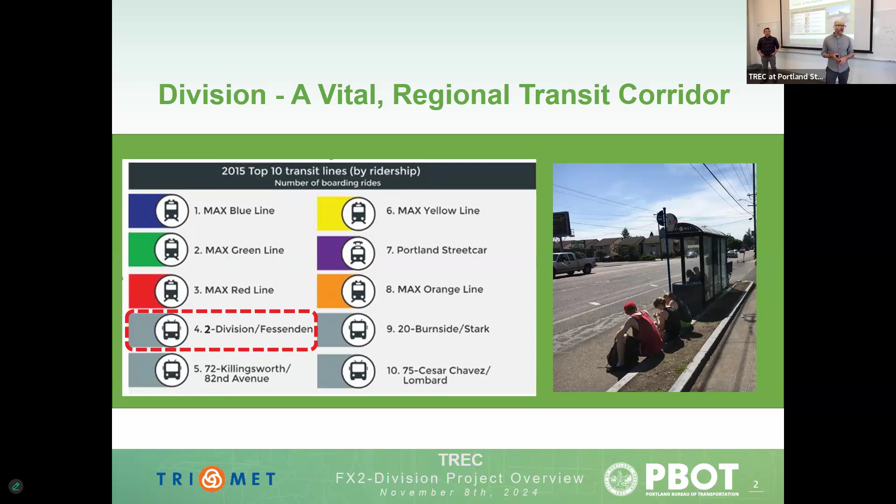Back in 2014, early planning started as part of the high capacity transit plan coming out of Metro to look at where BRT corridors could be in the region. Division Street at the time was right up there with MAX lines in terms of ridership. It had some of the highest ridership we saw anywhere in our system. And there was a real need to improve transit travel times and reliability, especially for those folks living in East Portland that really relied on that service to get to downtown and daily needs.

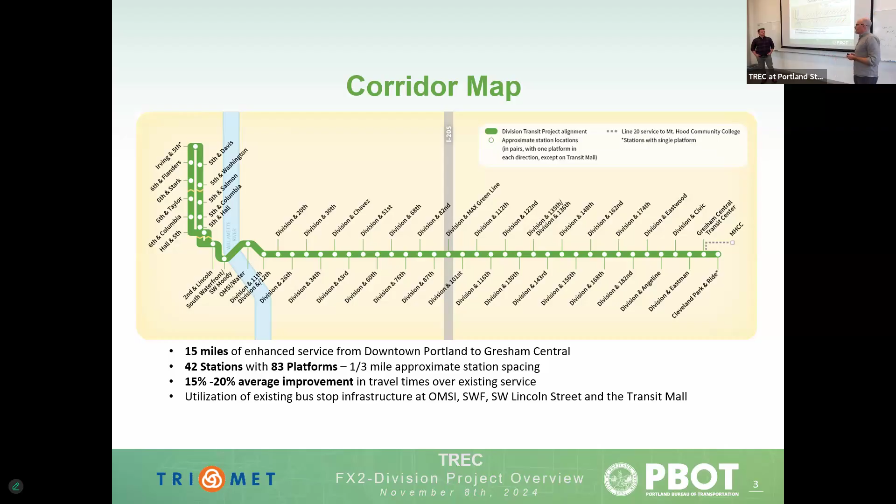In terms of the corridor itself, it is a 15-mile corridor when you take into account its connection within the transit mall. It connects downtown Portland to Gresham in the east, and it is made up of 83 station platforms placed about every third of a mile along the corridor. At the time, this was our first BRT, and we had hoped in doing our early planning and design work for about 15 to 20% travel time savings when we looked at all the different tools. And I'll talk about those tools in a moment.

In terms of just the overall timeline for the project, I had mentioned we had started the planning work in 2014. Design, what we call project development, really started in 2017. This was a Small Starts project, with FTA federal funding for half of the investment, which was a $175 million project. So design took place over the course of about 2 years, then construction for just shy of 3 years, with service ultimately opening in September of 2022.

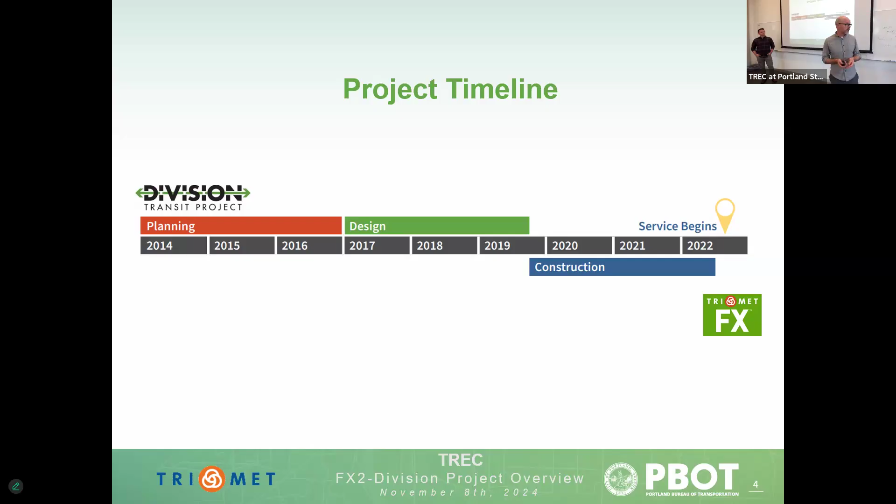So what does it mean when we talk about FX? What does it mean in terms of BRT for our region? For us, it means 60-foot articulated buses. I'm sure you've seen those green buses going up and down the transit mall with 3-door boarding. We have consolidated stops that I talked about. We ended up, I think, on Division, removing close to about half of the stops that were pre-existing on the corridor. And we really looked closely at where the highest ridership was, where we were getting most of the ramp deployments for mobility devices, and where their destinations are.

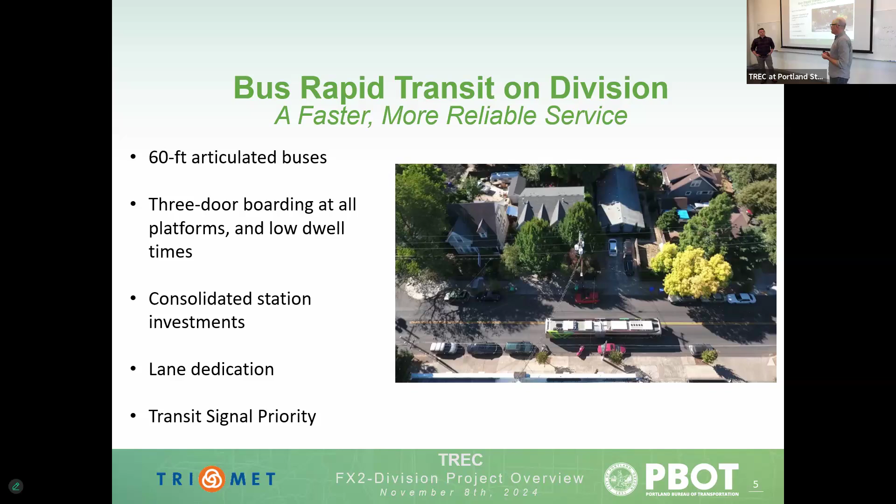And we use a host of other tools, including lane dedication. We'll talk more about transit signal priority in a moment, but placing stations far side of intersections to be able to get more efficiently through those intersections, having near level platforms so riders can step on and off the bus much more quickly, having bikes on board, having in-lane stops so a bus is not having to pull out and then pull back in. So a host of tools that we use to improve service on Division.

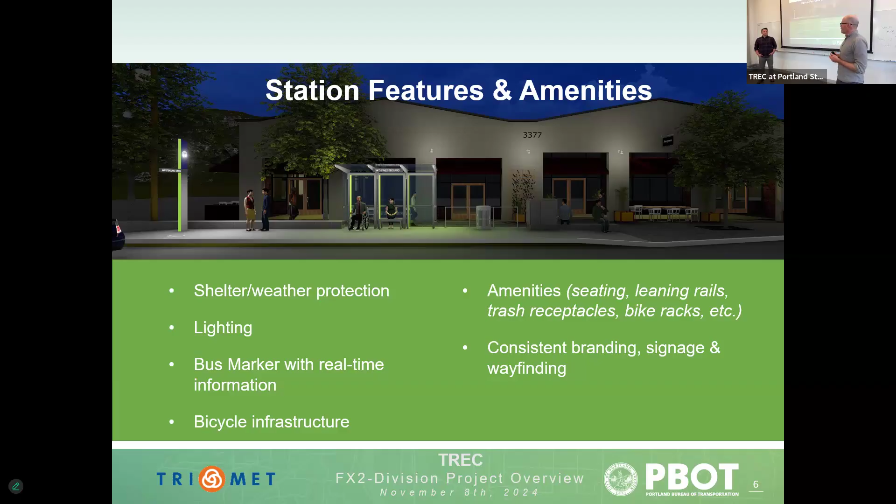I'm going to talk for a moment here about the station designs. For FX, and Division specifically, if you know Division, there's inner Division, which is a 2-lane cross section, sometimes a turn lane, and then you get out closer to Gresham and you get into a 5-lane cross section. And the urban context is very different. And so we knew we were operating in a lot of different contexts, and our station designs really needed to respond to that. And we also saw this as an opportunity to not only design for Division, but design for the region, anticipating we would do future FX in other places.

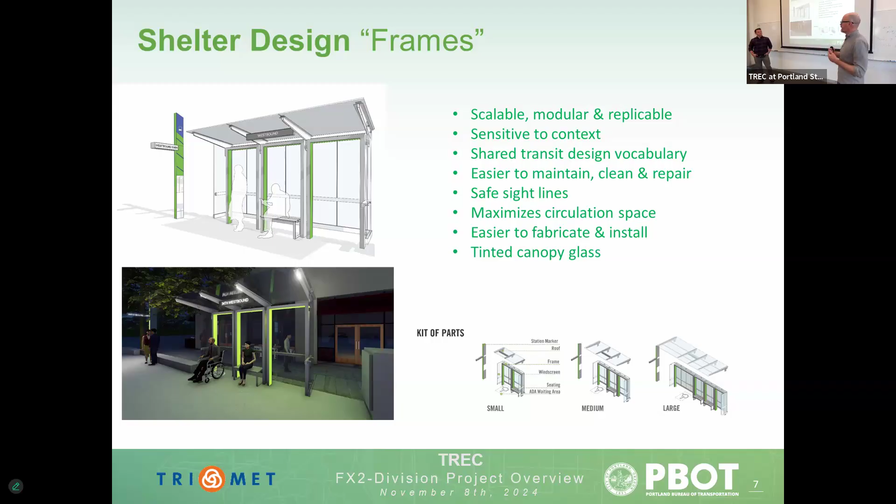And so we looked at a custom station design, a shelter design that we refer to as a frames design, that allowed us to really have this flexibility. So if we were right up against a building, we could look at reducing dimensions by removing some of the side wind screens, or if we had higher ridership, we could simply expand the shelter design. So we were really looking for this flexible design that could work in a myriad of contexts. And this station design we imagine to be rolled out on future FX lines as well.

Also, something unique to the project was looking at different station typologies to also respond to the context. Between 82nd and 175th, there is a protected bicycle lane, and we really needed to figure out a way to weave our stations within this constrained environment and with the protected bicycle lanes. So we ended up, after a 6-month work session working with a lot of different partners and interests, landing on what we called the shared bicycle and pedestrian platform design, which is a 4-foot step out, a 3-foot bike lane, and the station dimension can change, but it's typically anywhere between 10 and 12 feet.

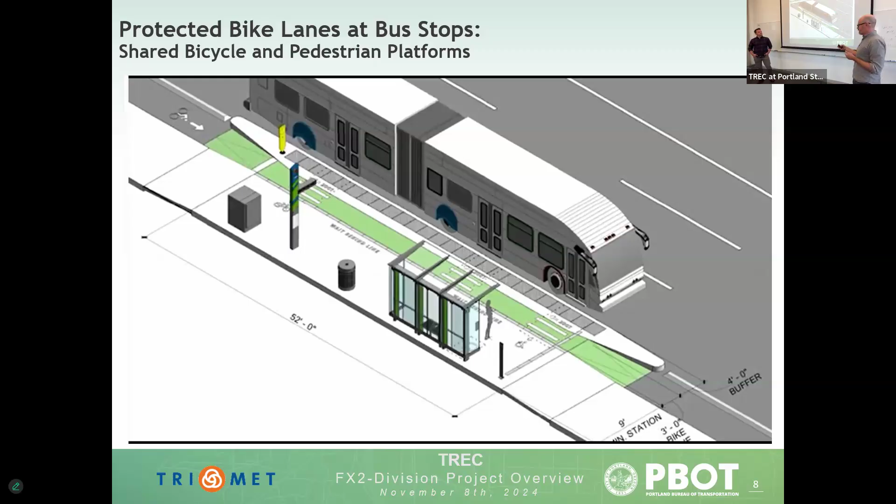And so this design was really a result of a lot of work with our partners, also involving groups like the Pedestrian Advisory Committee, the Bicycle Advisory Committee, and the Committee on Accessible Transportation. We started in work sessions with plans, then eventually graduated to putting tape on the ground, to then saying, hey, if we're really going to do this and put this across the corridor and potentially even use it elsewhere, we need to really understand how this works in the real world. And so we eventually built a full-scale mock-up out of plywood with the ability to have station elements and dimensions shift and change in real time.

And over a series of months, we orchestrated a series of simulated testing and brought operators out and bicycles out, people in mobility devices, and we asked them to run through a simulation of how this would work and really tested it from all of those perspectives.

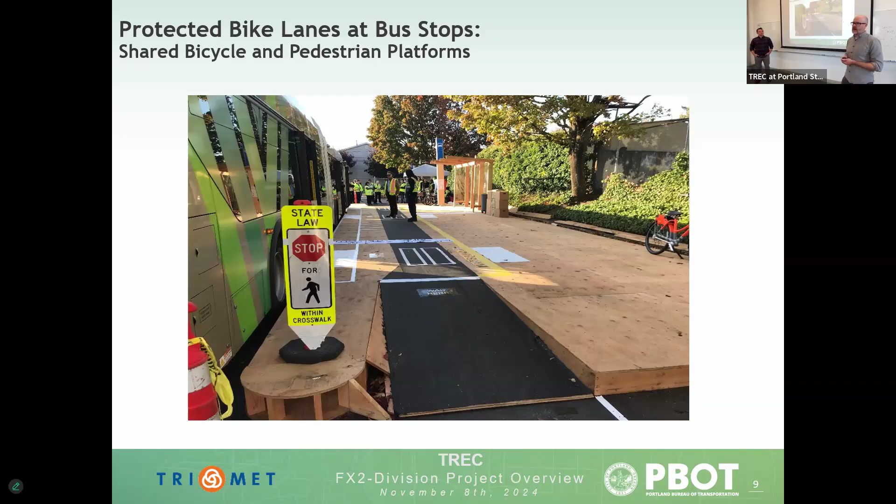We also asked individuals to be their baddest selves and act as if someone may not operate and use a platform how we think they may. So what does it mean if a bicycle is going the opposite direction? What does it mean if someone's walking in the bike lane? So we're testing all of those scenarios too, to make sure that if we were putting something out like this out in the street, we really understood how it operated.

And so ultimately, after doing that work, we ended up landing on this design, what again we call the shared bicycle and pedestrian platform design. The expectation is that when bikes come to a station platform area and there is a bus at the station, those bicycles stop, passengers unload and load, and then bicycles can continue. I think you can probably guess that that never happens, right?

So, just to continue this rigor around this station design, we ended up working with PSU, Nathan McNeil and his team. Again, we really wanted to understand how this was working, and not just by doing early study design, but once it's been implemented, what does that mean? Is it working? Is it not working? Are there places to have some of these modifications?

So Nathan and his team over the course of a couple years ended up doing monitoring of eight different station locations, to understand through the use of cameras, video, what those intersections are like. And as I mentioned, no surprise, the bicyclists never stop. But what we're finding is these station environments are working quite well. We're seeing very minor conflicts at times between pedestrians and bicyclists, but for the most part, they're able to navigate those

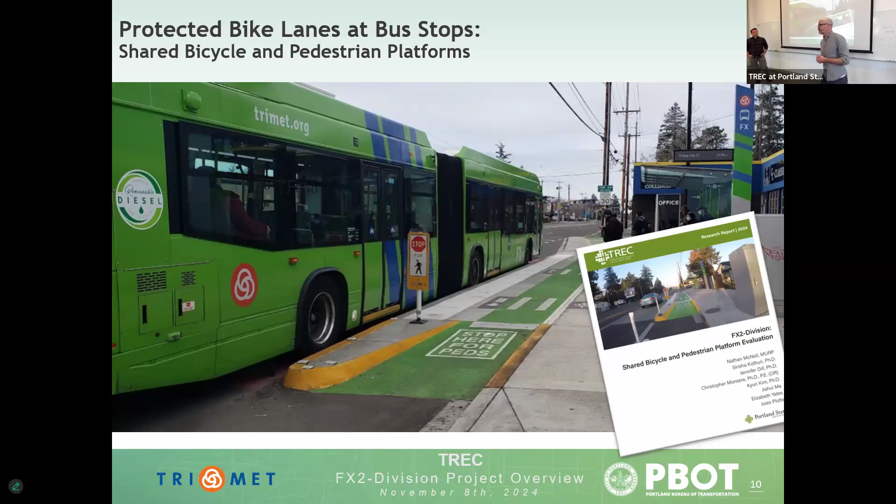relationships. And in a place like Division, where it's a high crash corridor, and when we put bikes in street and we see the conflicts in that case often being deadly, this seems like a far better approach if you were to ask me. So we're going to transition over to another tool. We had mentioned briefly transit signal priority, that ability for buses to talk to signals. And it is another place where for FX and Division, we are really looking to do something different and innovate. So I'll turn it over now to Mark to talk a little bit more about that system and how it was implemented and how it's performing on the corridor.

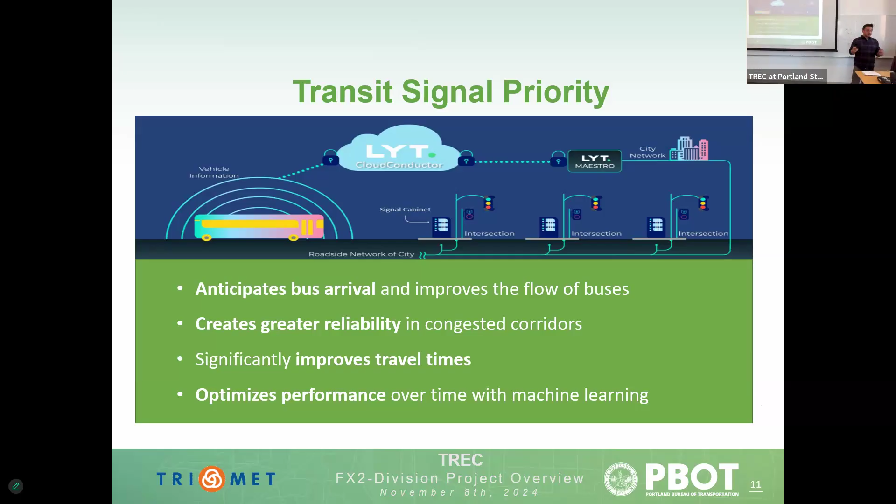But first, I want to kind of put you in my brain space as this project was being developed. So we had this incredible opportunity to reimagine what traffic signal operations look like along a corridor. We touched 45 signals as part of this project. We really wanted to rethink what are our priorities, what are our goals. And traffic operations relies heavily on space and time, but really mostly time. And since time affects everyone a little bit differently, we wanted to center ourselves by looking at our work through some lenses.

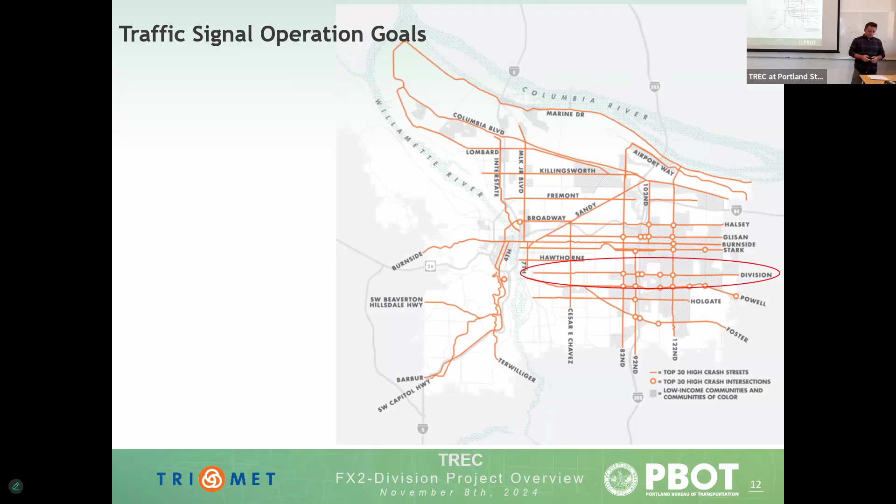So first, as Jesse mentioned, high crash corridor. Division is part of our high injury network. It is considered a high crash corridor. And 5 of the intersections along the corridor are also high crash intersections. So we wanted to look at our work through a lens of safety. The next lens was a lens of equity. There are 11 high equity zones along Division, according to the PBOT equity matrix. And what that means is those are places where we really want to focus our efforts, our investments, to improve the lives and livelihood of the communities that live there in a context that's appropriate for them.

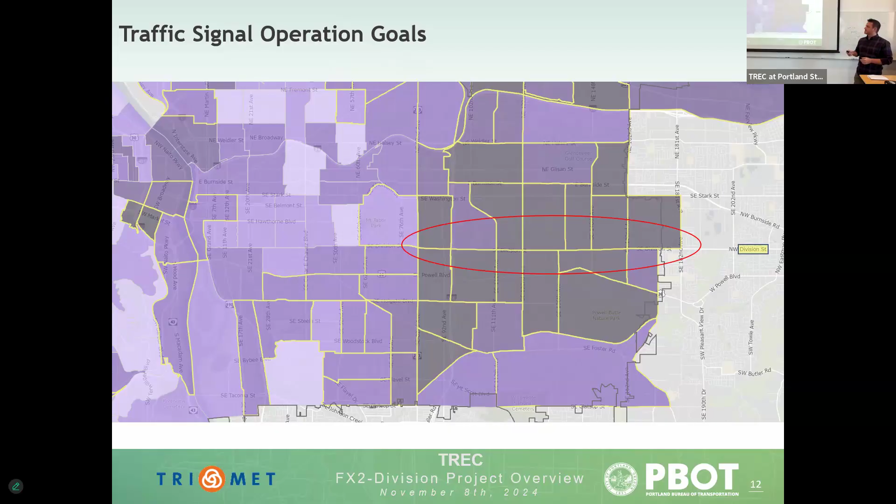And the third lens we chose to use was the PBOT modal hierarchy lens. So PBOT has a modal hierarchy where at the very top, the highest priority are people walking and rolling, then people on bikes, public transit, and then at the very bottom, private automobile use.

As I said, we touched 45 signals as part of this project. So that included all new signal timing for 45 traffic signals. There were also 2 ODOT signals and I think 9 or 11 Gresham signals. As part of that, we added 18 pedestrian head starts. Those are advanced walk or LPIs. That's what PBOT calls them.

At 14 locations, we exclusively phased the pedestrian movements crossing Division, which means we gave them an exclusive time in the cycle to further protect their movement. We also developed a ped priority routine for all 45 signals, and that's basically if someone pushes the button, they shouldn't have to wait for their time in the cycle to get access. They push the button, they get access almost immediately. And then we'll talk about next-gen TSP also at the 45 traffic signals.

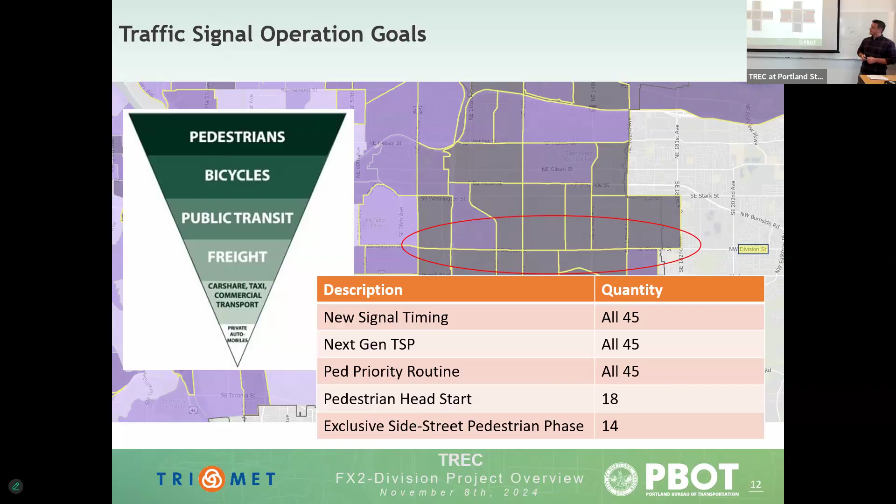So let me talk about design for a little bit, because all through this process, we were looking at design. How does that affect operations? How does that affect next-gen TSP? And how does that all work together to create a better system for people living and traveling on Division?

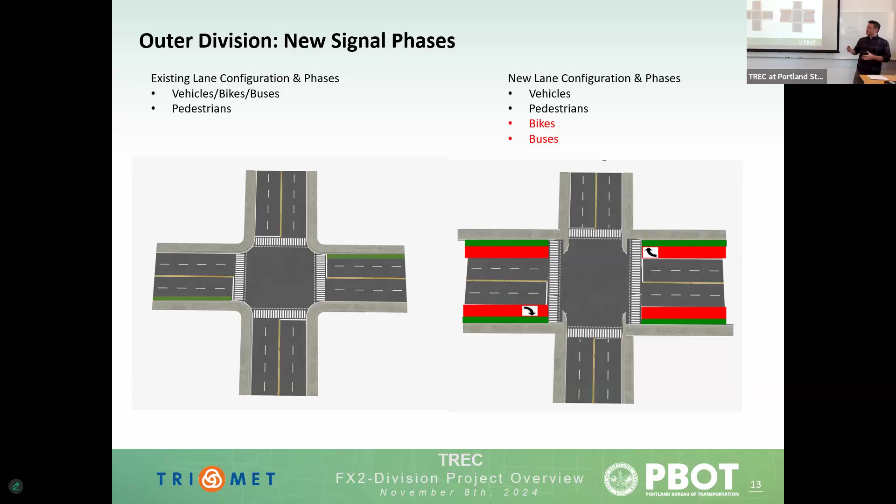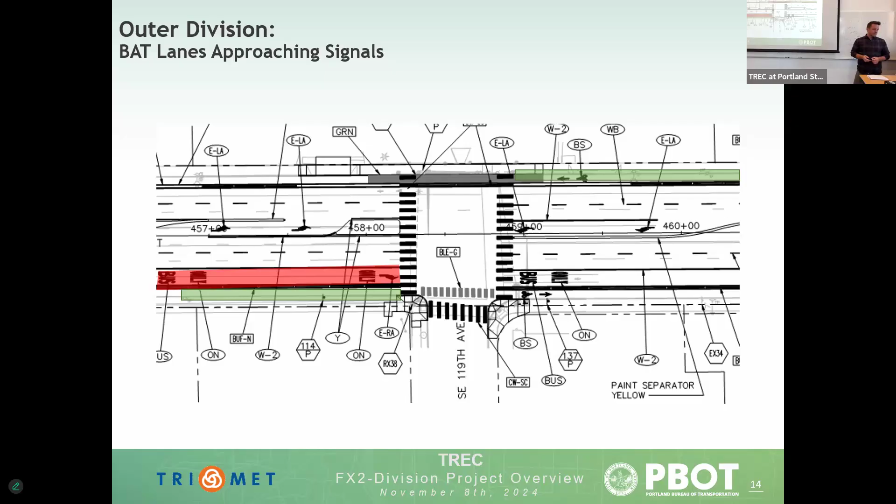So let's look at the design. So here's an example at 119th and Division, where we added the bus only lane and the right turn only lane to the left of a bike lane. You can see that in the eastbound direction. And what does that look like from a signals perspective? As you view the signal mast arm, you can see there are indications now for the through movement. There's a right turn only signal, a separated bike indication. And then we also introduced this bus signal to give further clarity for the bus operators and other traffic that there's something different happening here.

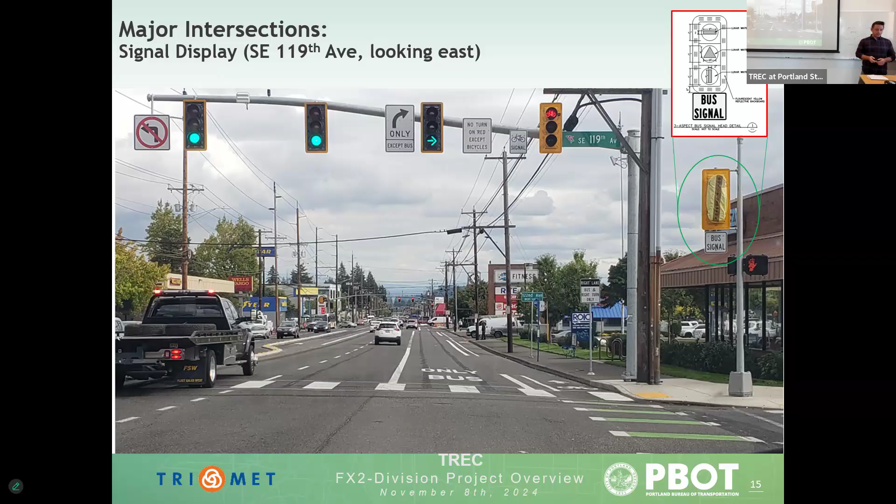Now, for that signal, we did rely on the 2009 MUTCD to create a design for the bus signal. So the horizontal bar represents the red, the vertical bar represents the green, and the triangle actually flashes, and that represents the yellow indication. Here again, you can see an approach. This is at 122nd and Division. And the bus just made it through. So now their signal shows a horizontal bar, which indicates red. And you see a protected right turn overlap that's happening at that time.

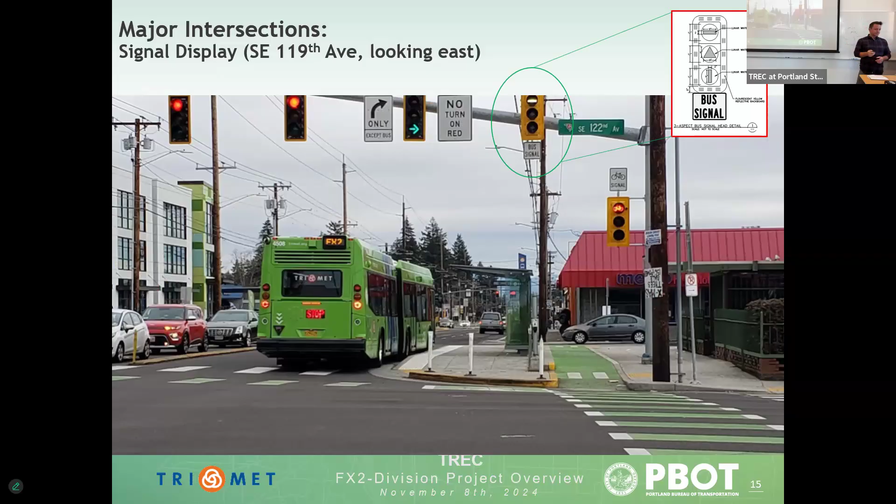So that was all part of the sort of design phase. These were some of the more complicated intersections, if you will. Now let's talk a little bit about operations. So here's that same intersection, 119th and Division. This would be a traditional 8-phase intersection. So our intersection timing might look something like this.

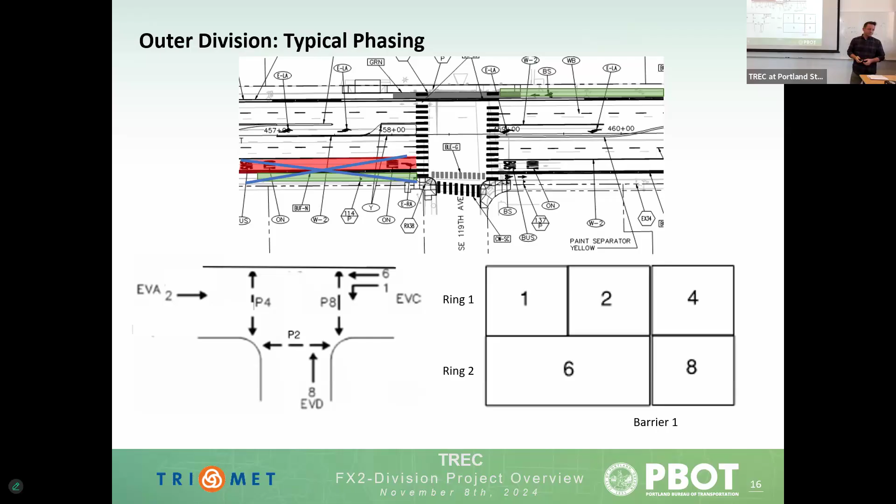And for those who haven't seen this before, imagine a vertical bar running through this rotation. And any square that vertical bar intersects, those are the movements that can go together. So you see 1 and 6 would be able to go together. And on the diagram to the left, you can see 1 and 6 would go together. So that's what it would traditionally look like.

But as we add these movements in, we wanted to maintain flexibility and responsiveness to the modes that are using the intersection. So we developed some different timing. So as we add in that right turn only lane, the bus lane, and move that bike lane a little bit further to the curb, we see now we have to operate this in a little bit different way. So the overlaps now are representing different movements that add efficiency and flexibility to the intersection.

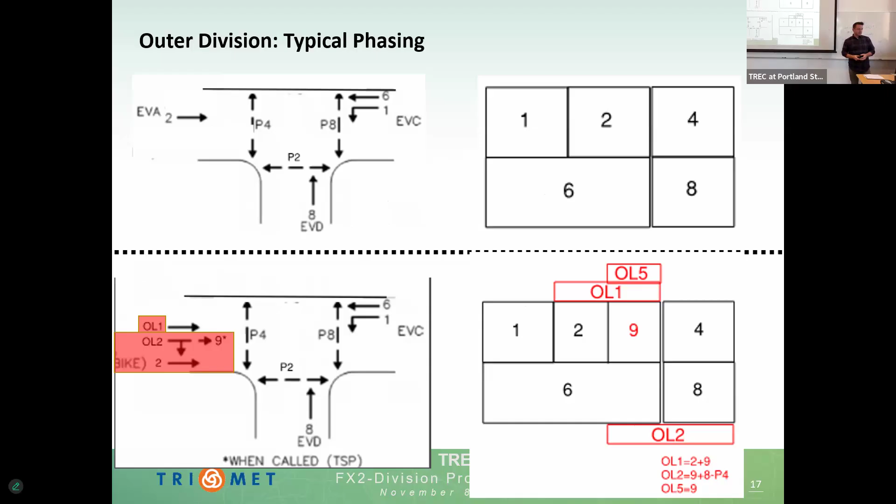Another thing that we decided to do along this corridor through a lens of safety, we decided not to run flashing yellow arrow operation. And there are some safety implications for a permissive left turn movement like that, especially considering people crossing the street. So what we did instead was we found another feature in the controller called vehicle reservice. And what this allows the controller to do is if there's a gap in oncoming traffic, we can bring up the protected left turn again in that same cycle, providing better performance for those left turns, while still maintaining the safety and separation for people crossing the street.

Now, all of these operation decisions took new technology. So about 5 or 6 years ago, we came up with a new standard for our vehicle detection. It used to be inductive loops placed around the intersection. Now we can capture 64 detection zones with just 8 radar detectors. And this has implications for paving activity and other things, but one of the great benefits here is we get a ton of data now about how our signal system is operating.

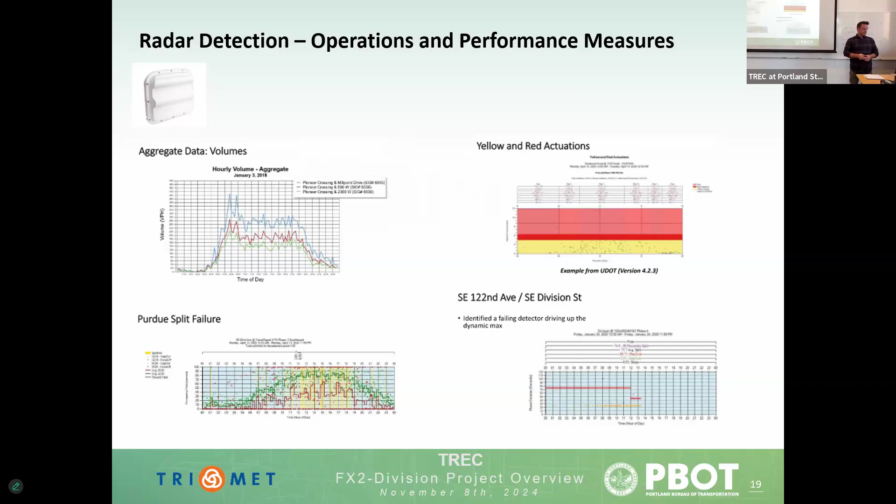So our radar detectors allow us to get not just the operational needs of the intersection taken care of, but we can also get a ton of data about how the intersection is responding to the different needs of the intersection.

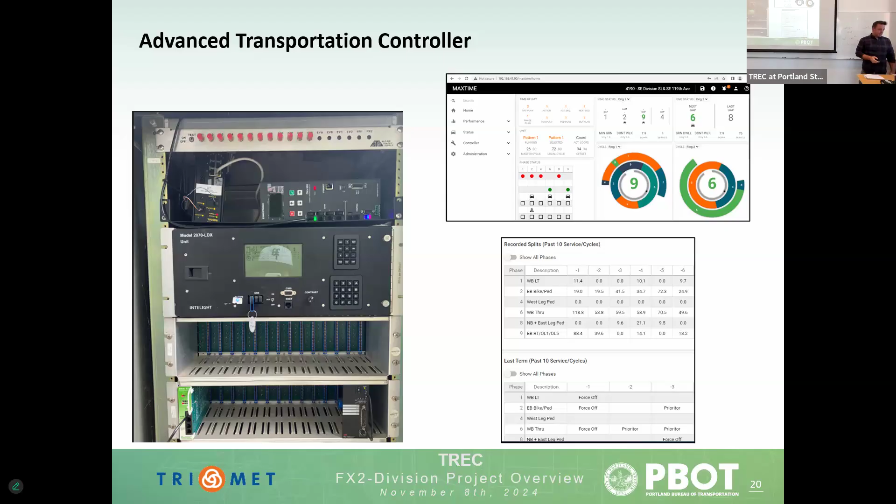Okay, so that was kind of a warm up. Now we're going to get a little more wonky. Who's ready?

Okay, so 3 of the intersections on this corridor have protected intersection elements. So protected intersection, in this case, I'm going to just talk about the piece where the cyclist movement pushes further away from the intersection to make its crossing, creating additional separation between the right turn movements and the ped and bike movements that are concurrent. So with a design like this, there were a lot more movements to think about. We had to think deeply about which movements can go together. How do we continue to protect people walking and rolling through the intersection?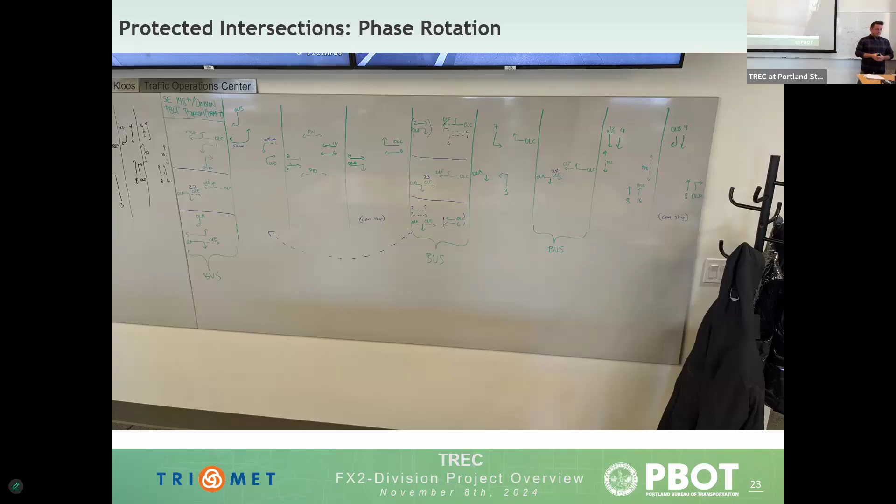And this was before we knew who our vendor was for the next gen transit signal priority system. So we actually offer a leading, a lagging, and a third opportunity for the bus to get through the signal. And what this means is that a bus could be delayed maybe up to 40 seconds if the system didn't work correctly. So worst case scenario, it's about a 40-second delay for the bus. So this was a big step in how do we get the bus through, and how do we protect people walking and rolling through the intersection. And what it took is basically, instead of running each phase as a phase, we run it as an overlap. So everything is described with its concurrent movements.

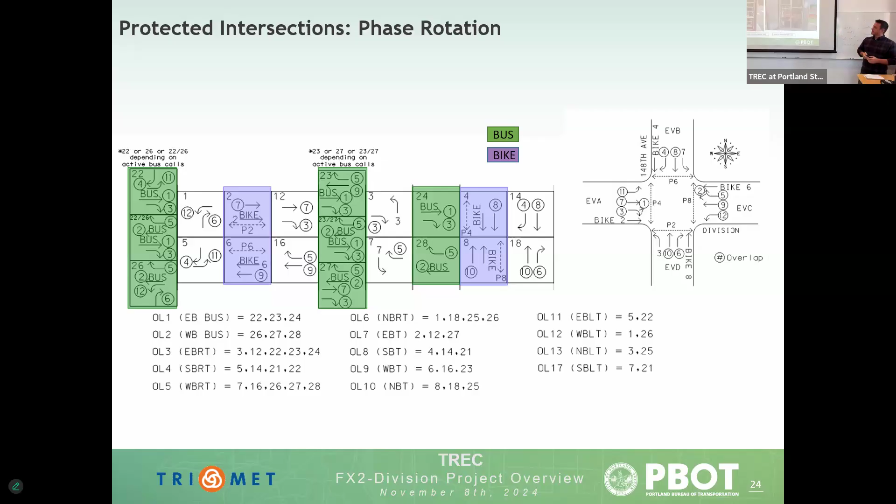And that ended up being a lot. There were a lot of concurrent movements that could happen. So much so that we had to think outside the box, literally. The 332 cabinet on the left is what we traditionally use for traffic signals. It can only hold up to 18 outputs. Those are the actual outputs that run the signal heads themselves.

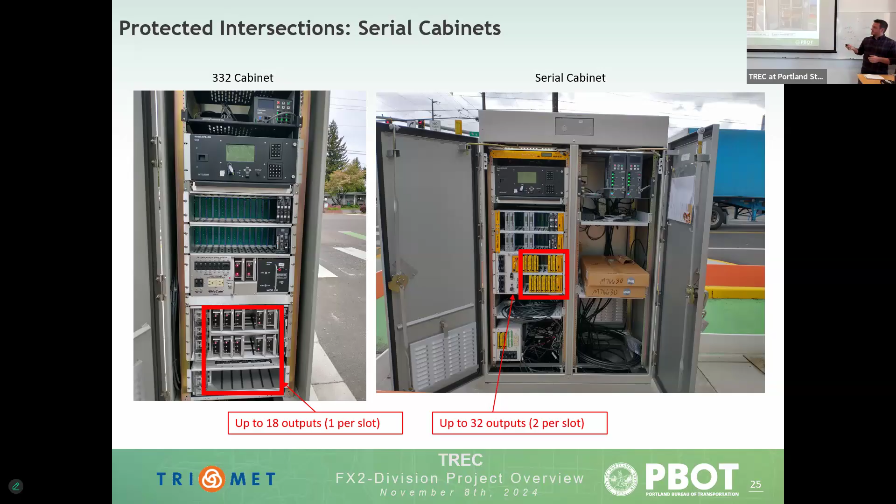With a design like this, we had to move on to a serial cabinet. That can do up to 32 different indications or groups of indications at the same time. One of the benefits here is that we get an updated conflict monitor, meaning if 2 green movements happen at the same time that shouldn't happen, the signal will go, okay, that's not supposed to happen, go into red flash.

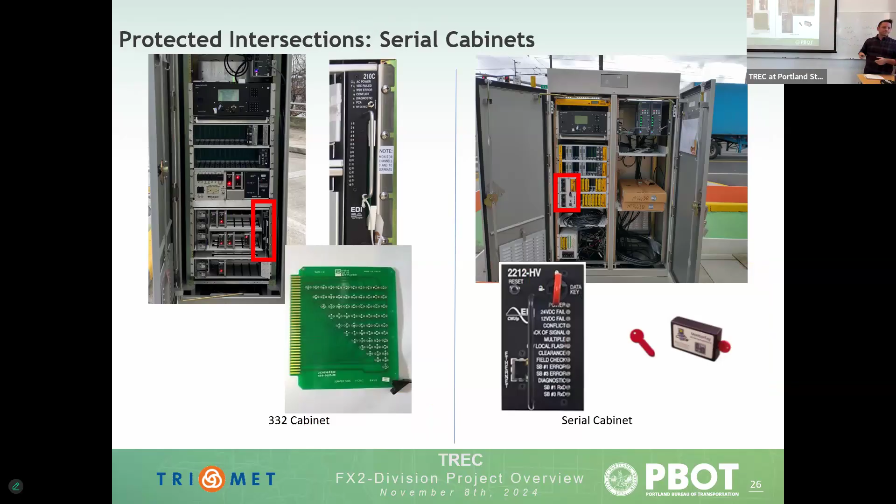Now we can monitor things like conflicting yellows. Rather than wasting these circuit boards, these diode cards, we can just update the data key. So it's, again, a little bit better for our maintenance teams. And this is a picture of the back. So the wiring is pretty similar, but the nice thing here is you can pull out the terminals, do your wiring, plug it back in, rather than trying to fit a bunch of wires on one screw-in terminal.

Okay, so that's a little bit about the design and operations. Now I want to just take a brief moment to talk about the unsung hero here. As we get into this conversation about TSP next, fiber really has become our backbone for our communication on this corridor. And again, we did something a little bit different, a little bit outside the box. So traditionally, fiber looks like it does on the left. We needed more fiber, more capacity for our communication system on this corridor. So we went with something called a ribbon fiber.

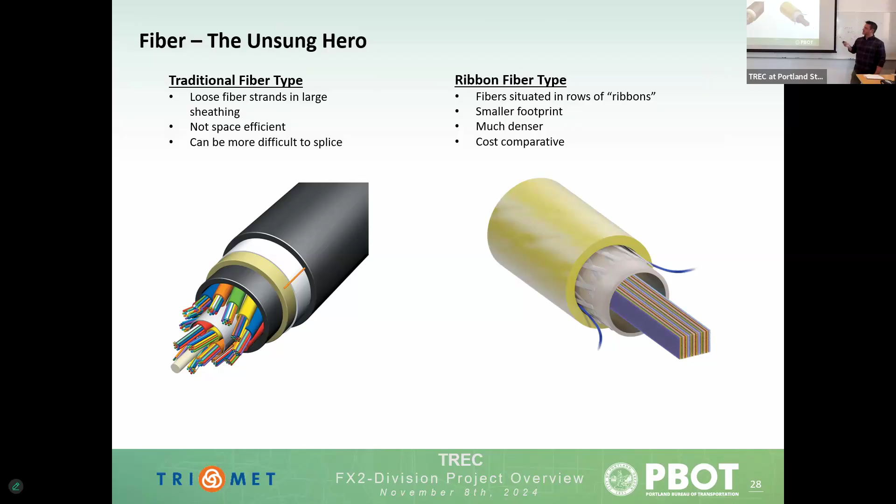And each one of these, it's hard to see again in the picture, but each one of these ribbons holds a certain amount of fiber strands. So it's a little bit more efficient packaging to get bigger capacity. And maybe this is a better view of it. At the top, you see the 96 strand. And at the bottom, what we went with is a 432 strand. So 432 strands of fiber running along the corridor as the backbone. And you can see the sheathing on the left. They're about the same width and diameter, but you get a ton more capacity.

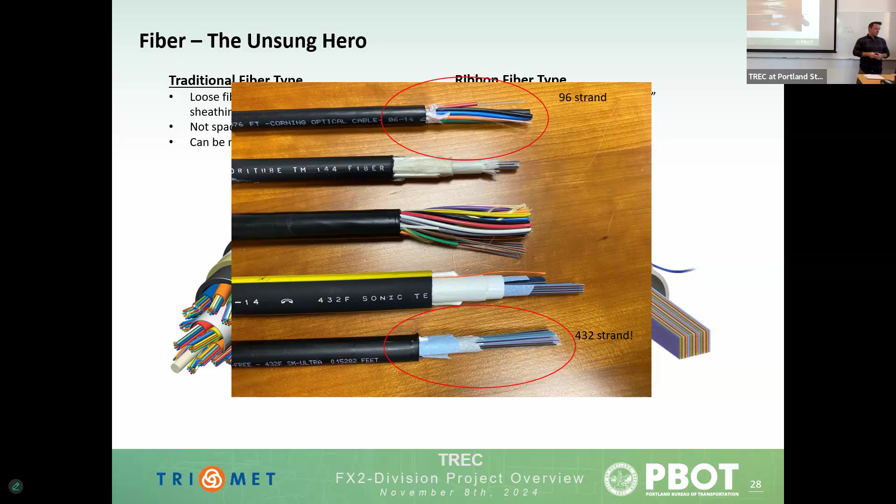And then I went to OMSI with my kids and I saw this and I thought this was interesting. So on the left, again, you see 3,000 pair or 6,000 copper wires running an old phone system. And on the right, 24 strands of fiber. And even at that size, the fiber has over 300 times the capacity of the old 3,000 pair.

So this was huge because I'm talking about data collection. I'm talking about live access to our controllers. We need something like a fiber backbone to be secure, redundant, and accessible in order for us to be able to continue to respond to our communities.

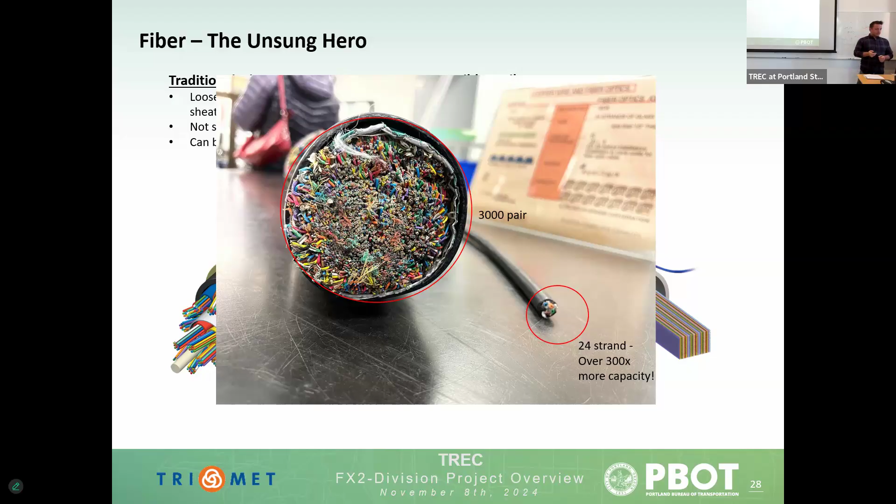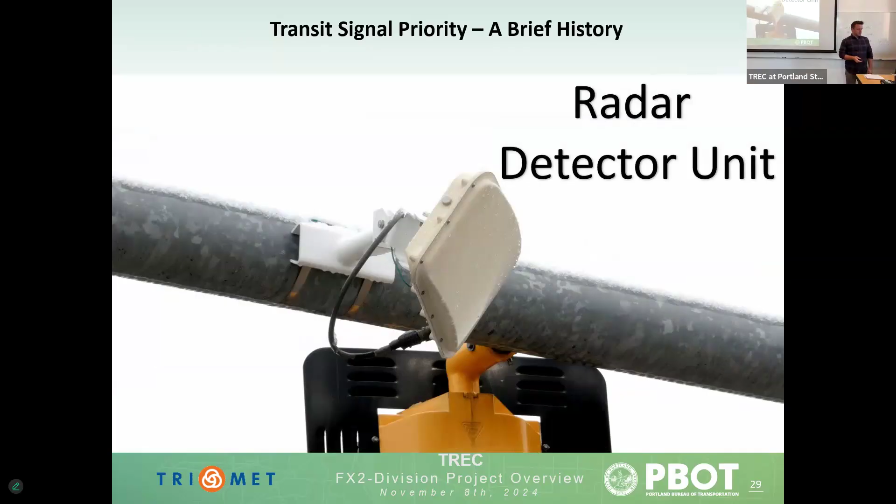The Opticom receiver, the primary use of it is to provide preemption or the highest level of priority for emergency vehicles. Now, back in 1999, the city also developed what I call the legacy transit signal priority system. And it also used these line of sight detectors to provide priority for buses. Now, why don't we use preemption for buses? Why do we use priority and not the highest level priority, preemption?

The OAR says that it dictates kind of what we can do and can't do with bus priority. And one of the main things is we can't change the sequence of the traffic signal controller. So it must maintain the sequence it usually has. And that means that if the bus approaches on a red, we can do everything we can to give it an early green without changing the sequence. If it arrives on green, we can give it a little bit more green time to get through that signal. And this was great for 1999.

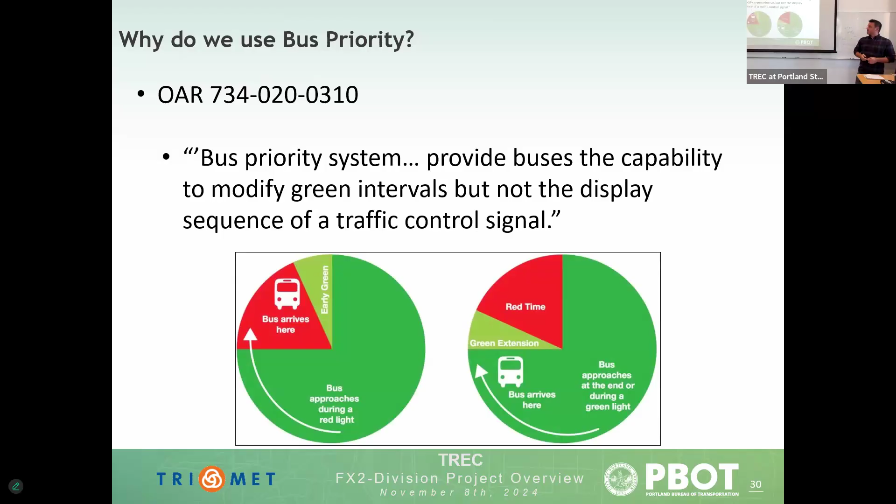And this is kind of what it looked like on the street. So the bus is traveling along, it's kind of blasting an IR at our signal saying, hey, I need priority. And the signal is doing its best to react to that input. Now this is line of sight, so it's maybe 300, 600 feet.

And one of the challenges here, maybe a benefit, if you will, depending on how you ask the question, but one of the challenges for me as an operator is I only know what's happening on my side of the system. And even back then, I barely knew. I didn't have remote access. I didn't have the data streams I have now. And TriMet really knew what was happening with the bus, but they didn't really know what was happening with the signal system. Was the benefit happening for the bus? Were they getting their TSP?

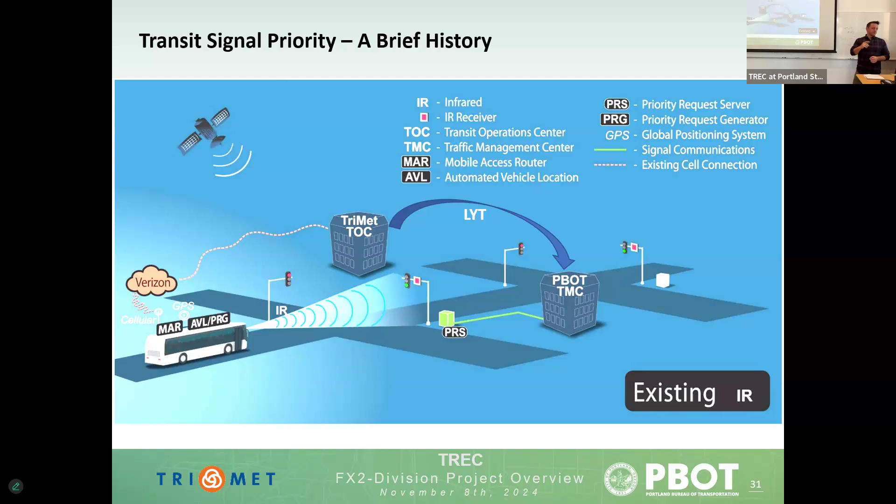We went through an RFP process and decided regionally on a vendor, and their name is LYT. They provide cloud-based transit signal priority, and they really developed a bridge between our two systems. Again, one of the challenges with that is when you integrate new systems, sometimes you run into other things that you didn't expect. So their system relies on a Maestro device, like a little Apple TV, if you will, or Raspberry Pi size. That fits on our network, and we didn't like that. It's connected to the internet, and it's sitting on our closed network.

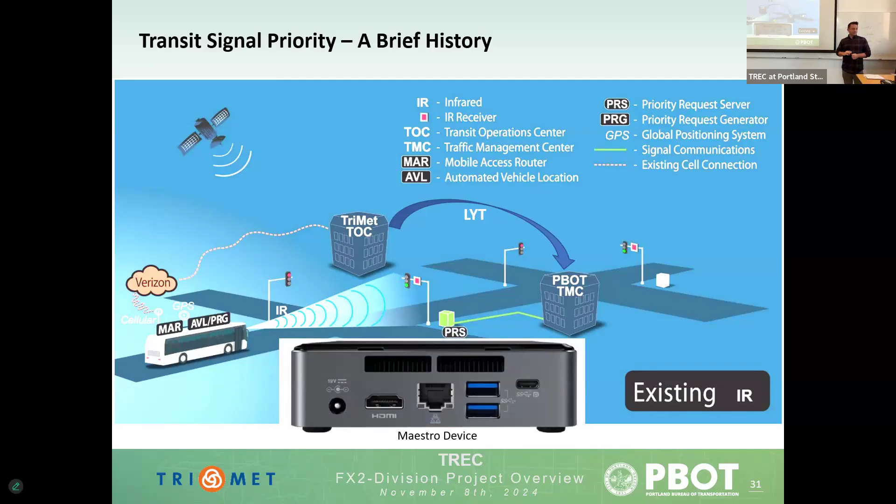So what we had to do was develop a tunnel. We created our separate VLAN. We run it through an entirely different firewall and try to separate and tunnelize that data stream as much as we can. But it does provide quite a few benefits.

So now the bus is talking through LYT. It's going through a machine learned predictive ETA model that then sends an ETA check-in and check-out to the next 3 signals in a row. So we're not now limited to 300, 600 feet away. We know when the bus requires a green with high certainty. This is also great for near side stops because that ETA is built into that near side stop.

And here's kind of what it looks like visually. The purple line represents the normalized ETA that we're receiving. The orange line is the speed of the bus, and the white dots are the bus stations. You can also see the signals there are integrated into the ETA. So we're getting ETA station to station and also signal to signal.

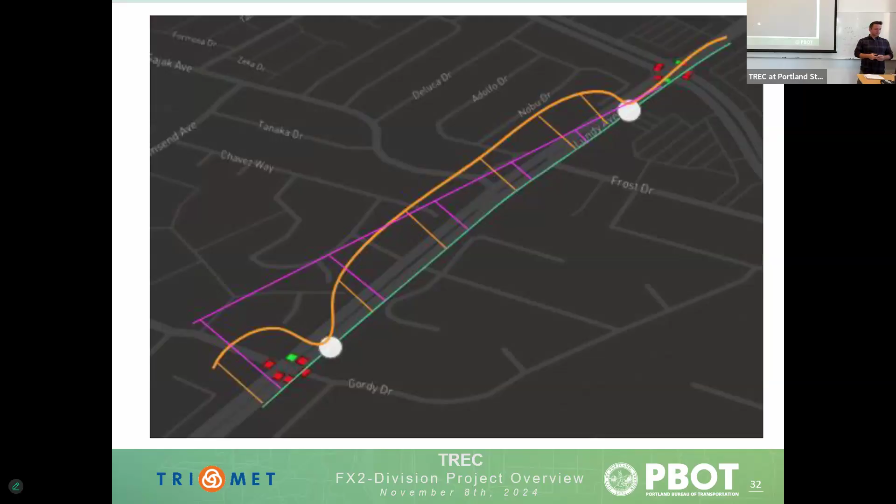Now, when we got the vendor, we had the design, we thought about operations. Now it's time to look at the controller. What can the controller do for us for TSP? And this is really the main page for the controller. It doesn't have a lot on here, and we can't use skip phases or skip ped in Oregon.

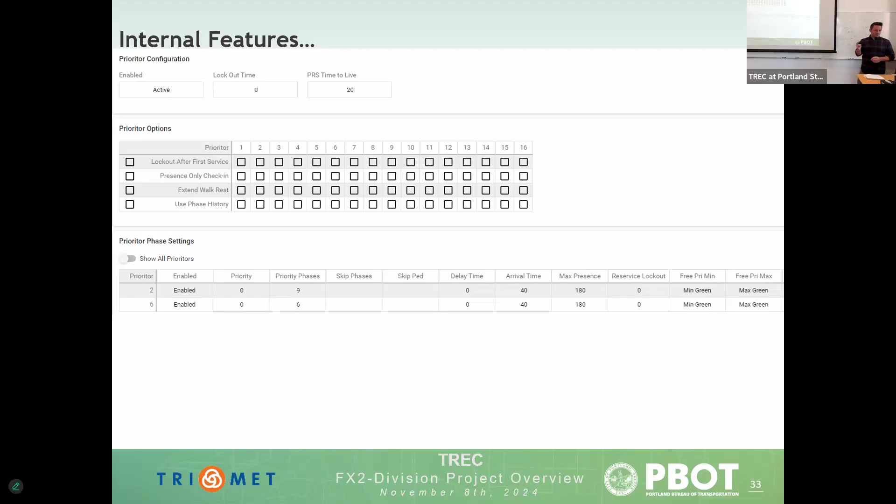So we did a bunch of testing to see what this would offer, and it often looked a lot like the legacy system. So the bus would get a green extension even if it was 2 minutes away, and the signal would hold the green a long time and then terminate right when the bus approached. So right when it needed its service, it would get a yellow or red. And since I believe that TSP is only good if it actually serves the people who ride the bus, I wanted to make it better. I wanted to give priority to people crossing, accessing their station before the bus arrives, rather than seeing their bus leave and waving at it.

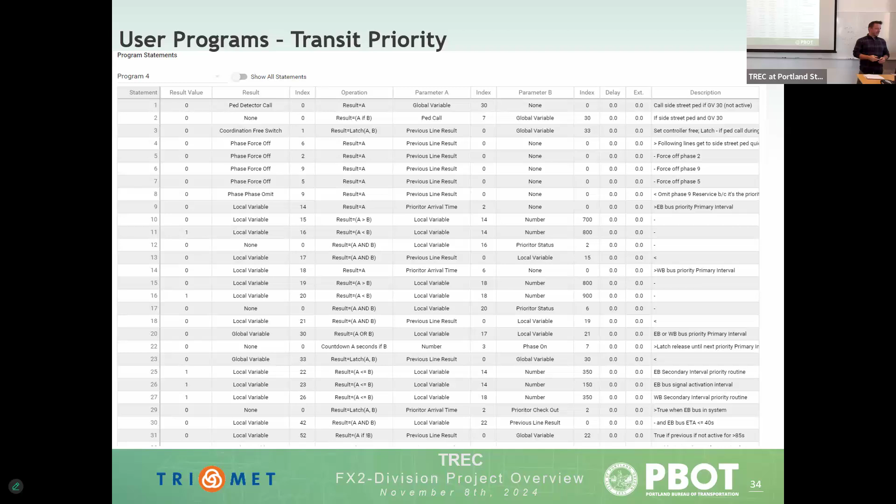Here, and bear with me, I put these animations in PowerPoint, so they're as good as I could do. Here's the bus, it's approaching. It's greater than 120 seconds away, so we're saying don't accept information about that bus. It's also maybe greater than 3 signals ahead, so again, TSP is inactive, the bus is just traveling along. As it gets closer within that 2-minute ETA, now it's checked into our controller, and our controller is saying, okay, I see you, I'm going to start reacting to what's happening.

As the bus approaches, it gets into that purple zone. So we know it's far enough away. We know enough about how our signal is operating. We can do something like provide PED priority, get people to their near side station, so that way they can actually access the bus as it's approaching.

Now the bus is a little bit closer, and this picture doesn't do a good job, but maybe it's actually serving the stop, and that's included in the ETA. So we want to kind of be in a holding pattern, be in a place in this phase diagram where we're right before that bus opportunity in the phase diagram. And we hold the signal horizontal bar or red. We don't want to provide an early green for the bus.

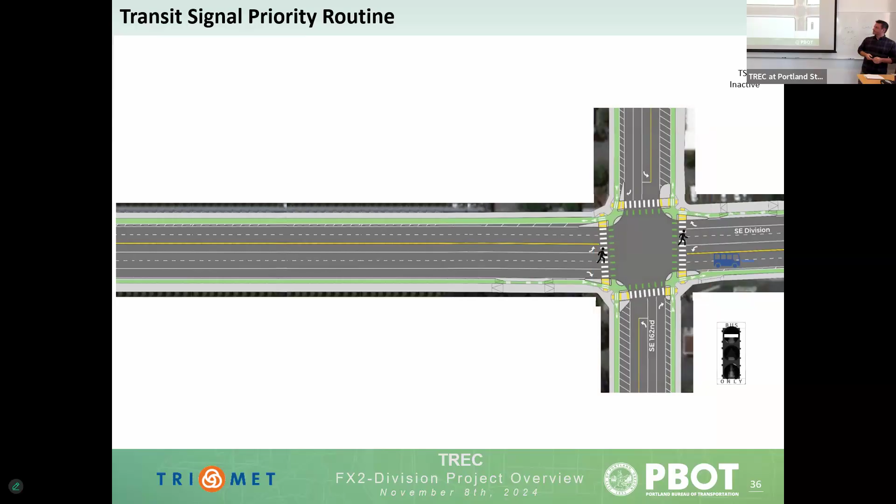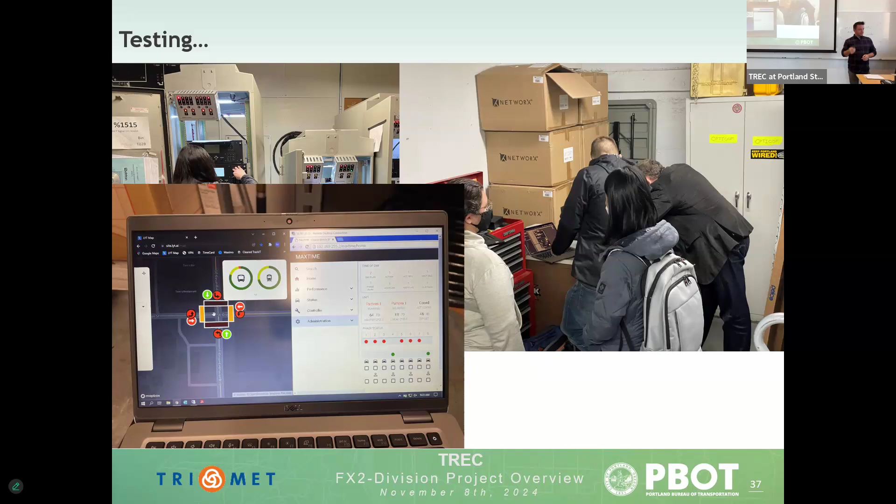So all of this was sort of outside of the controller, what the controller features allow me to do. And so I wanted to make sure we tested it. And we did a lot of testing in the shop, testing in a testing environment. We got LYT out here to do a preview of their system. We finally started testing at one intersection in the field. And then we got on the bus and we tested the entire corridor. So LYT was on the bus, PBOT was on the bus. We were traveling through these signals as they were receiving that ETA up to 3 signals ahead, up to 120 seconds away.

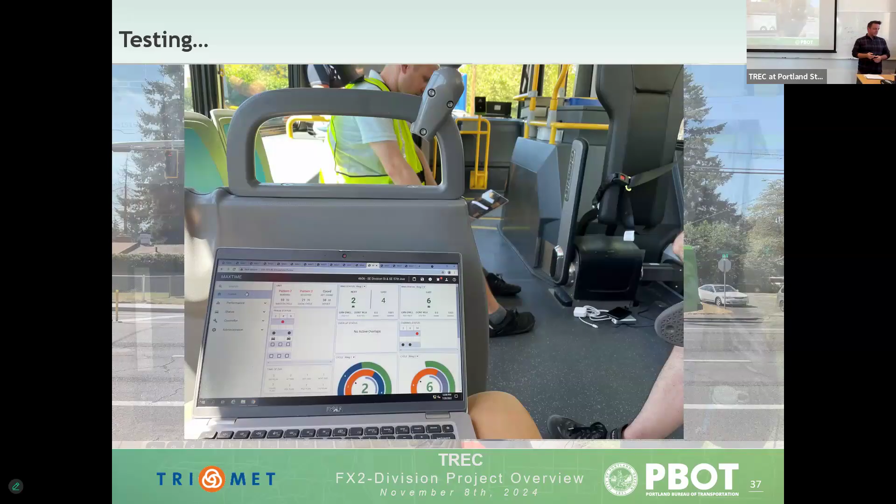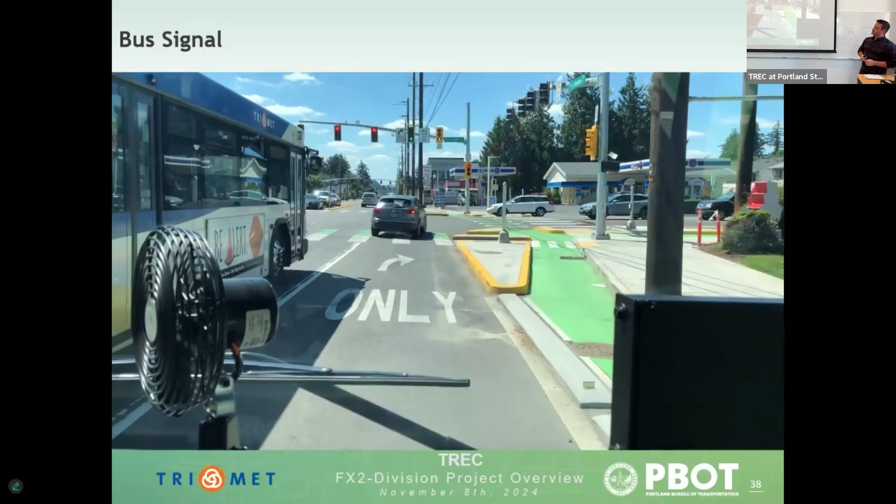And now I want to show you what a bus signal looks like as you go through. Let's see if this works. So here we're waiting for the red, we're waiting for the vertical bar, people are moving along. There it goes, vertical bar, and the concurrent right turn only signal goes. You can also notice the concurrent left turn signal goes. Someone runs the red when they're not supposed to, right in front of the bus, and don't worry, the person on the scooter stops. But you get a queue jump type operation that way. And that's all run on the ETA. There's no other input that's activating it.

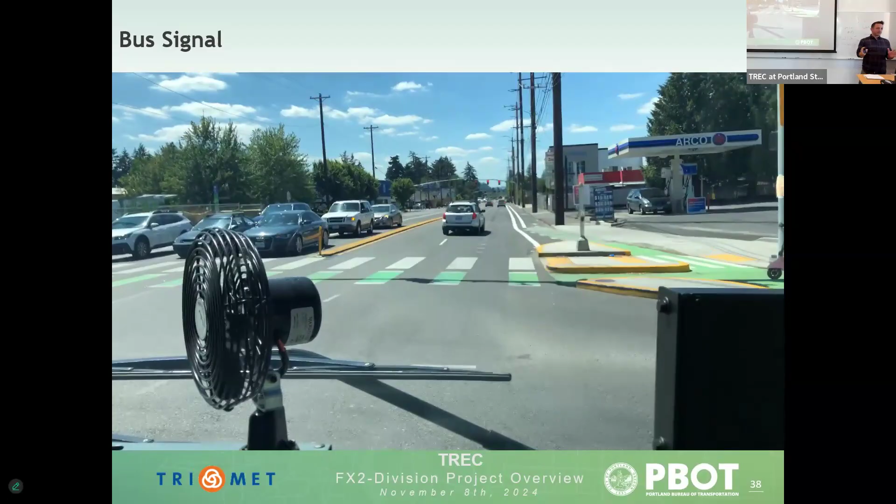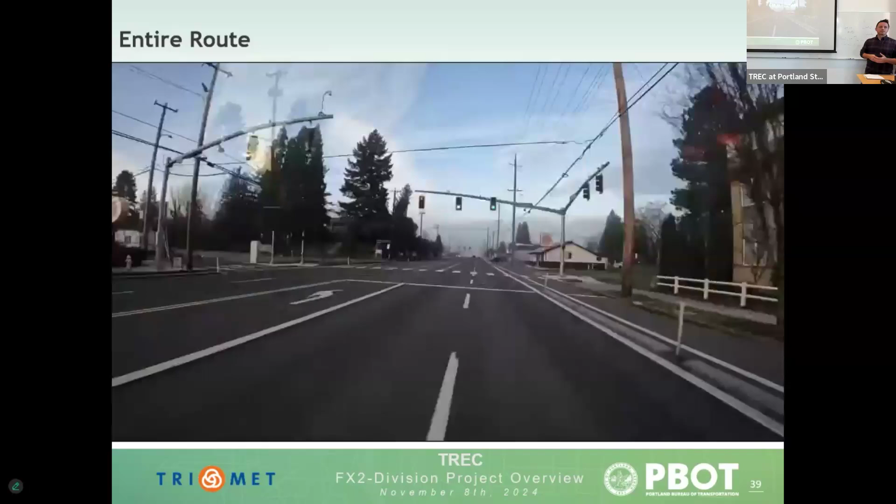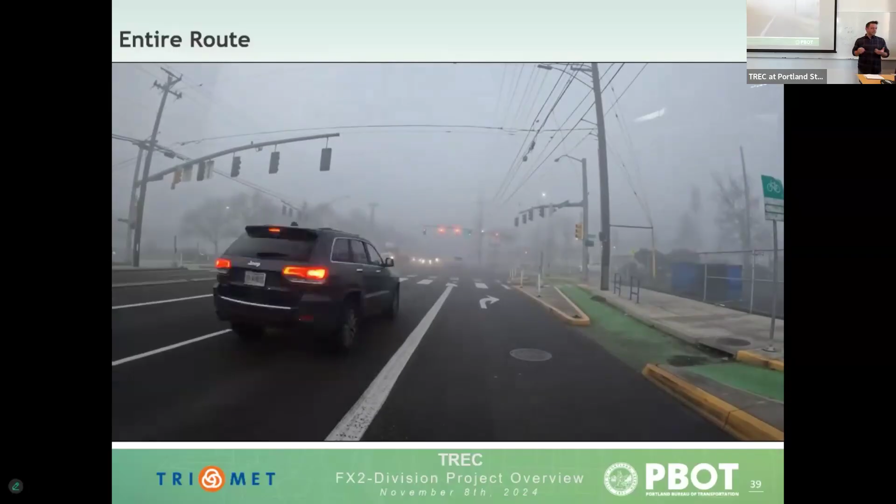And then I also want to show this video from TriMet to just show the bus going. You notice it stops at some locations where it's going to stop, or there's a non-detection issue like 130. But generally it makes it through. There's the vertical bar again. It makes it through almost everything. Oh, there is one in the middle run by ODOT. They use a different set of policies, so the bus does wait. You can also see the bus kneel down a little bit for each station that it serves.

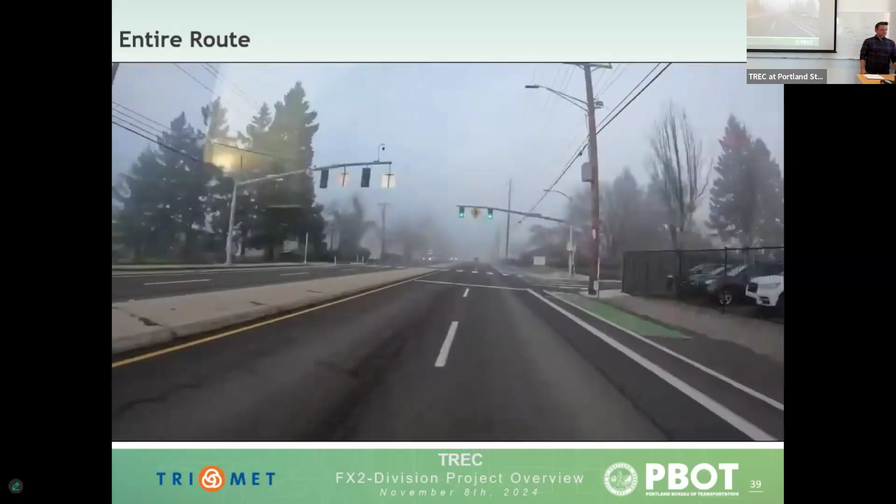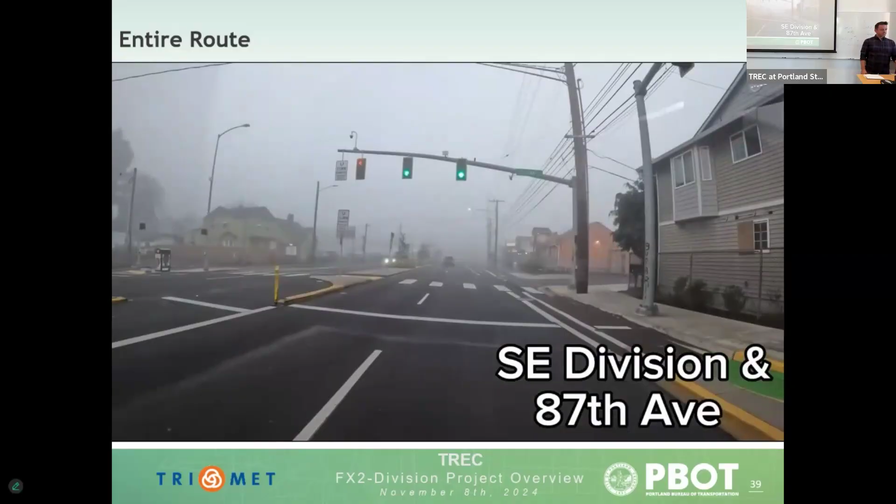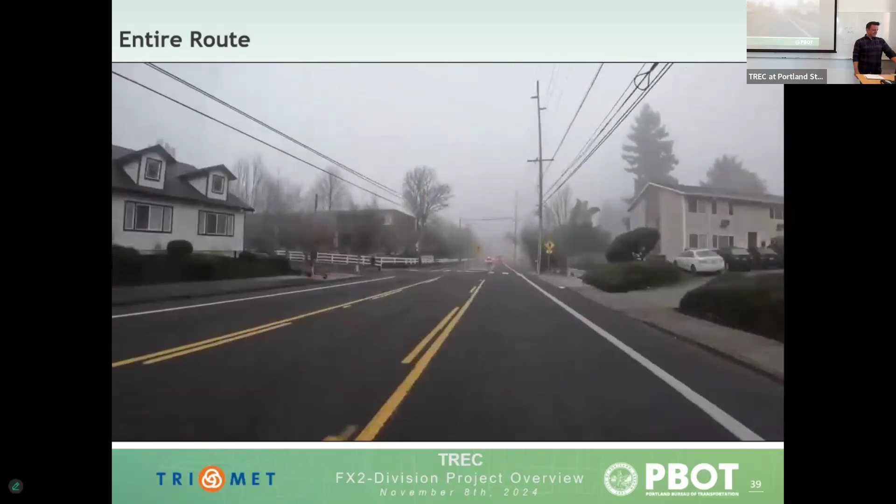Signal. Stop it there, but yeah, this is a really cool one. You can find it on YouTube. It goes through the whole corridor. Is there an east one as well? Not that I know of.

So even though TSP isn't acting on that bridge signal, we're offering TriMet kind of a visual into our side of the system saying, okay, now the Hawthorne Bridge has lifted, and now TriMet can make different business decisions about what they want to do with their bus. Do they want to reroute? Is it going to be long enough?

Similarly, at 11th and 12th, just south of Couch, there's a heavy rail and a light rail crossing there. We give them insights into our system so they can build business rules around what they want to do about rerouting the bus. So this is a huge benefit, not just for signals acted on by TSP, but also signals in the system that the route goes through.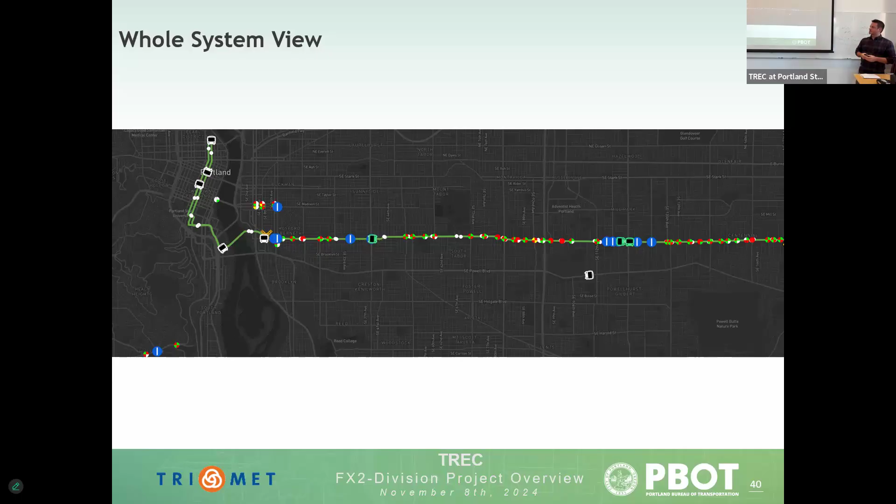I will also mention one challenge with this is we have so much more visibility. We have all the data streams, we have all the cool graphics and the fun systems to play with. But what that means is that sometimes it's really easy to focus on being responsive to this system and ignoring the other systems that our communities depend on so heavily. So, while it's a huge benefit for the FX, I want to just caution that, pay attention to your other systems too and work to make those as good as some of these other ones are.

So I'll talk a little bit about before and after results from the TSP side, and then I'll hand it back over to Jess. As part of this project, TriMet hired a third-party engineering team to do a before and after study. Now, it wasn't a clear before and after. It was after the project had been completed. What happened was we turned off the TSP system. Then we turned on just the LYT piece of the TSP system without the PBOT logic that I developed. And then we turned it all back on. And we kind of did a before and after study that way.

So the TSP system with the PBOT logic reduced the travel time by about 8 minutes round trip. So every day, if you saved 8 minutes, what would you do with that time? That's something I like to think about. Just with the TSP, just the LYT system alone, it reduced travel time for the bus about 5%, and then you add in the PBOT logic that I developed, and it increases that reduction to 10%. The on-time percentage improved from 65 to 76, and the headway improved from 53 to 67.

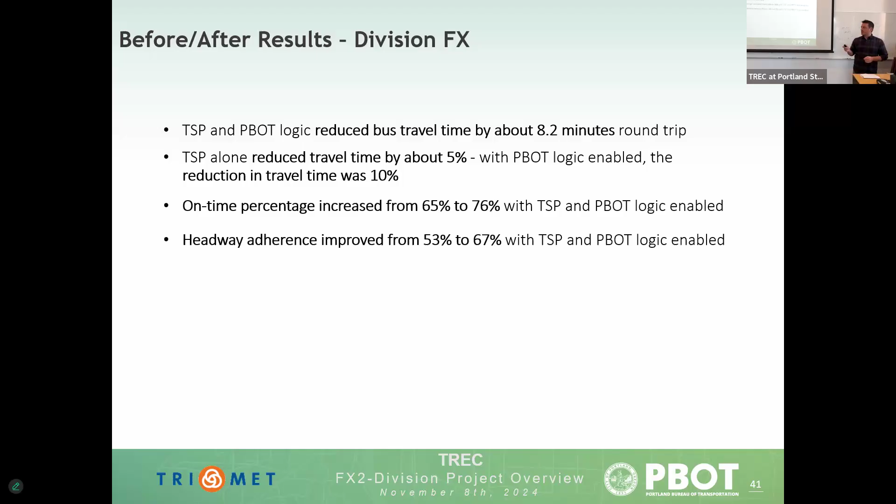Now, these next two I'm personally proud of. The ped bike delay with just the TSP alone, just the LYT system, not the PBOT logic, increased. But then once you add in the PBOT logic, it actually went back to a non-TSP scenario, as if nothing ever happened, as if we weren't benefiting the bus at all. When you add in that little bit of effort, think about the problem in a different way, you can improve all modes, not just the bus. Similar with motorist delay, split failures, those increase with just the TSP alone, but then you add in the logic that I developed, and that reduces back down to a non-TSP scenario.

I talked a little bit about our TSP expansions, and those have seen a 50 to 75% decrease in red light delay, just for transit. Now, although we probably won't have the funding to do this sort of before and after for every TSP deployment, hopefully the FX deployments we will. But this is a nice benefit to the system too. We get that red light delay basically right away after deployment. So we can see the benefits for transit pretty clearly after we deploy the TSP system.

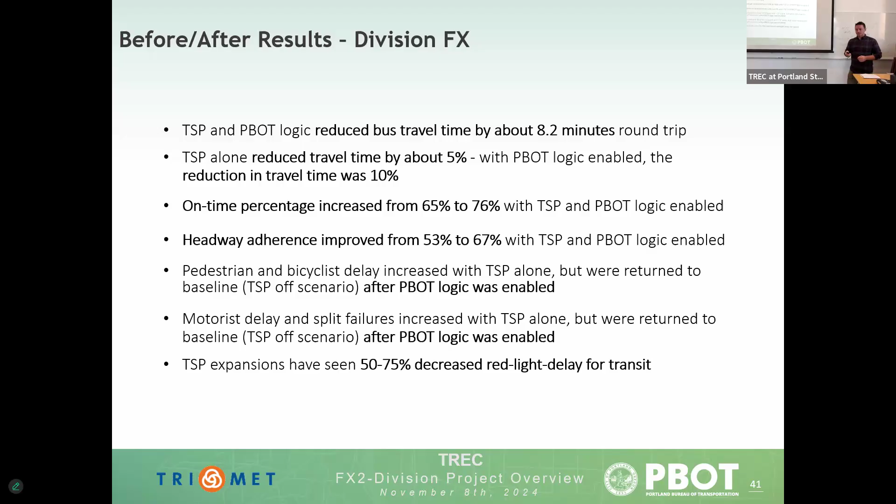Okay, so thanks for that dive into transit signal priority, Mark. We're going to zoom back out a little bit and share a little bit about what we now know about the project, being that we've been open for a couple years. So Mark had mentioned some of those travel time improvements we've seen. This is a bit older data, but what we're seeing is in different segments of the corridor, travel times for the bus really being on mark, if not exceeding those expectations that we had during planning phase of the project.

If you remember earlier in the presentation, I mentioned we were really hoping for somewhere around 15 to 20%, and we really exceeded that in some locations. And my sense is that we may be seeing some improved travel times even over this, since some of this data was collected.

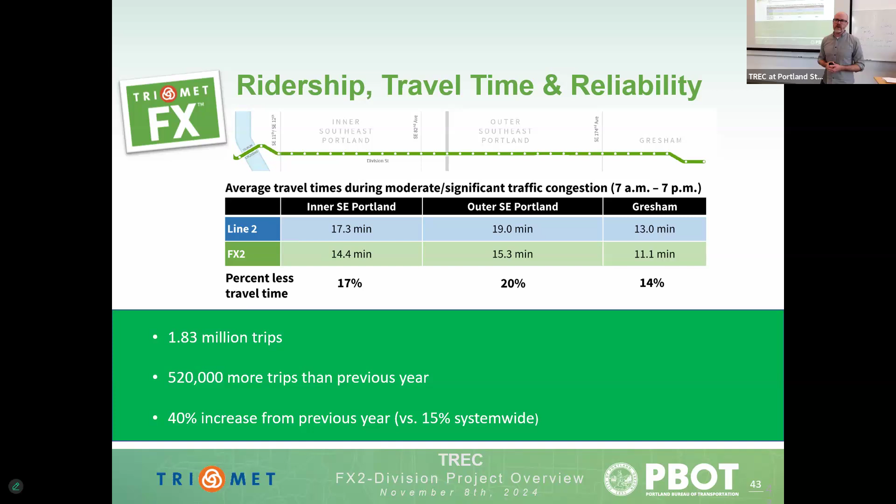It's also important to remember that we opened during the pandemic, and we've seen as a system our ridership go down quite a bit because of the pandemic. But post-pandemic, we've seen ridership on FX2 on Division go up 40%. That's a big jump over where we're seeing elsewhere in our system, which is around 15%. We're continuing to see ridership increase on the line. So it's a really good sign that this service is performing well, that it's attracting riders, that it's really ultimately serving what we want it to, which is to get people to their destinations quicker and more reliably.

With these projects, we also have opportunity to leverage them to do something more. When we look at transit projects like this, when it comes with federal funding, we are hyper-focused on the transit investment. We have to be, but we also recognize that there's opportunities to partner with PBOT, to partner with others regionally to deliver something more than just the transit investment and really set the table for improvements for the community. So in the case of FX2, we were able to do a lot in the way of improving crosswalks. If you remember, this was a high crash corridor, so safety was #1 priority.

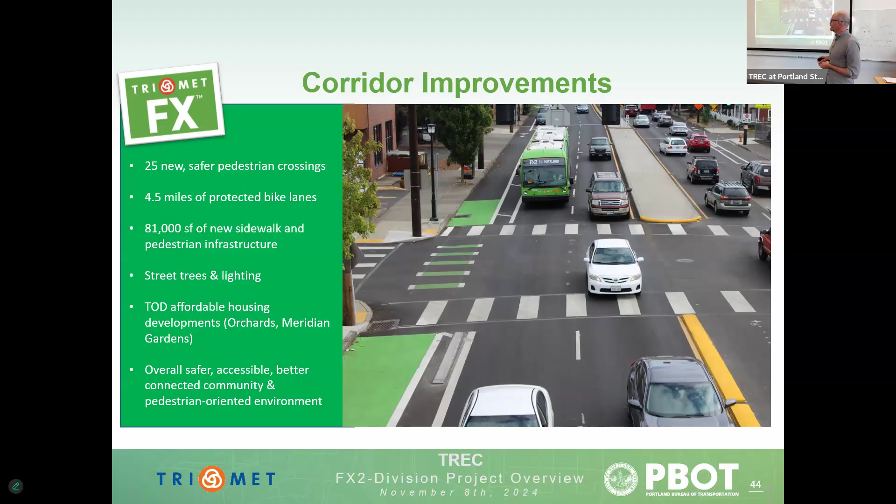So being able to provide those safer pedestrian crossings, Mark had shown some of those protected intersections that improve pedestrian environments significantly, able to do things like implement street trees, improve corridor lighting, partner with Metro and others to start being able to prime development for TOD to integrate affordable housing connected to transit. And again, improve overall safety and accessibility within a corridor where we were seeing fatalities and far too many crashes and incidents of harm.

And then as a landscape architect, urban designer, I'm very proud of the opportunities we had to really improve the urban environment and to do things within the corridor that at the time people were really skeptical of. As we are in inner Division, if you've been there, you know that this is a very lively streetscape, and the sidewalk corridor is a place where people are out and eating dinner and having drinks. And there was a lot of concern about what a transit investment and big stations coming into that environment would look like.

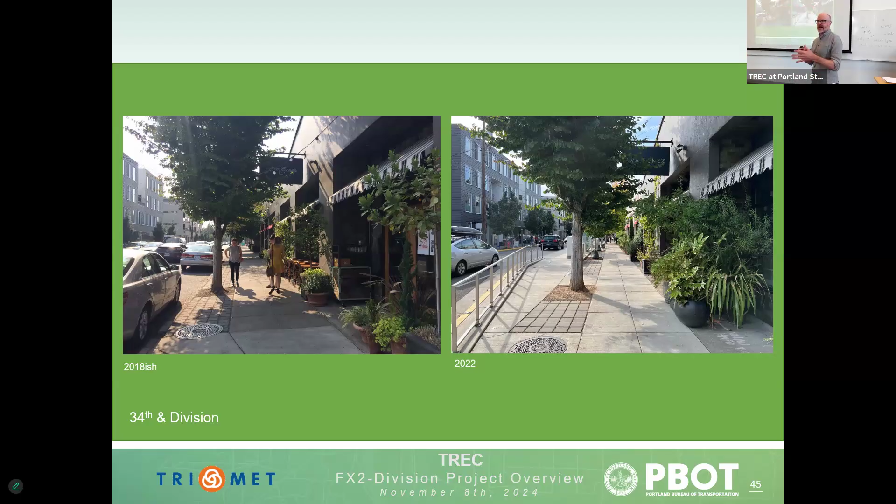And so in our work, we really looked to understand what were those needs that they have, and how can our transit investments really build on some of the work that is already happening out there and really improve that urban environment. And if you go to a place like Ava Gene's or Lauretta Jean's on a Saturday night in the summer, you can see that space blended between the existing sidewalk and now our transit environments are really one. And you can see people eating pie at our transit stops and really treating that as almost like an extension of that sidewalk space, almost like a mini plaza space.

As we look ahead, we're looking to the next FX. And so I mentioned earlier in the presentation the high capacity transit plan that was developed in partnership with Metro. And so we've been really using that as a launching off point to look at what does it mean to have an FX system within our region, within the Portland region. If you go to other places like Minneapolis, Seattle, you'll see that there's a network of bus rapid transit, and we see a real opportunity in a network like this that better connects our community.

And so our system plan that we're working on with our partners really looks to prioritize those corridors and really leverage those connections to better connect our community. So we're really early in that planning work. We just have draft standards that we started to review this week, but we're really excited about rolling out FX beyond just Division.